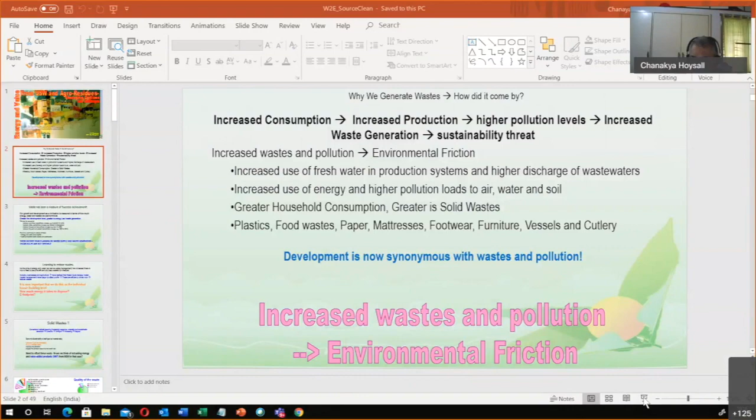Okay, I'll start sharing the screen as well. Yes. Oh, I should have known. How do I unshare the screen? In slideshow, okay. Sir, there is a tab called share. I have multiple screens, so that's my problem. Maybe you have to share only one particular PPT screen. Yeah. Now I'm sharing the right screen. You can see that? Yes, we can see your slides, sir. Second slide we can see. Okay, thank you very much.

And also urban solid waste for a long time has been a major problem. Bangalore has always been in the news because most people in Bangalore are aware and they would like to have a better city. So there is a lot of reaction and activism from the population, and that is driving the city of Bangalore to make better and better waste management systems, especially trying to recover energy and value-added products.

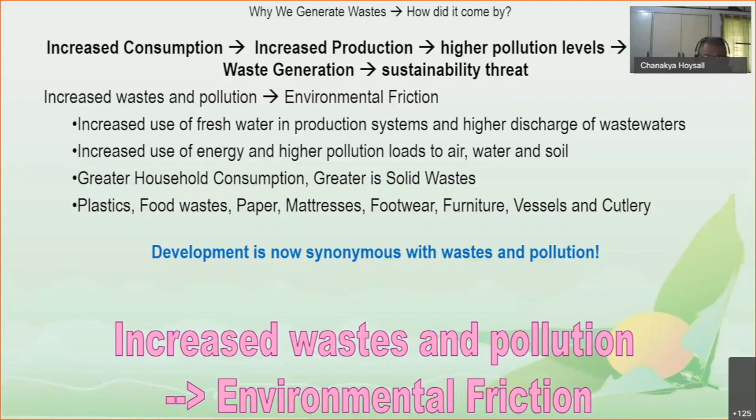Waste has been very problematic and comes in multiple levels. One is our lifestyle, the other is our aspiration as well. One of our major aspiration drivers which leads to increased waste is the fact that we measure our success and achievement by comparing it to some other developed country. One of the typical indications you will find is people saying Indian people's wastes are very small, which means they're not developed.

So you compare Bangalore with New York. People in Bangalore have a per capita waste production of 0.5 kilos, and in New York City it is 2 kgs per day, which means they are developed. Your aspiration now becomes to reach that point, and ironically, we end up generating more waste. I don't need to elaborate on this, because the more you start ordering on the internet, the more solid waste you're going to start generating.

So we make this kind of funny comparison, or in the back of our mind, for some reason, we are stuck on the idea that we have to waste something, and only then can we show that we have progressed. So if you are very frugal, very careful, and don't throw out any waste, your neighbors are going to laugh at you: see, they don't even waste anything. This is the surprising thing you'll find in the social construct, and this is also something that you need to break, along with creating new technologies for this.

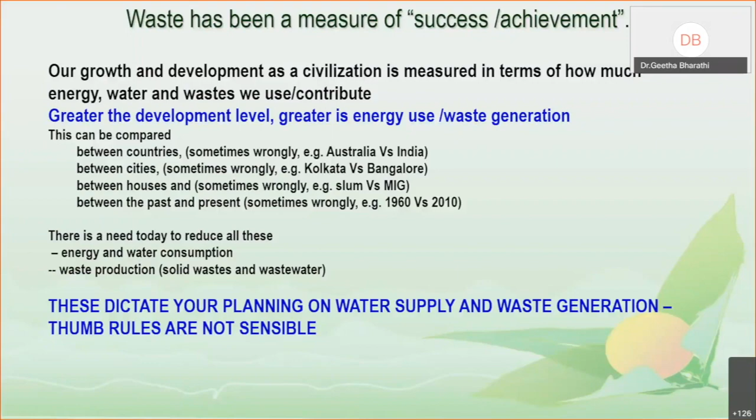So these are the things that dictate how we need to plan for the future, how we need to address or capture the increasing waste generation and the composition of waste generation in our future. Thumb rules that we used yesterday are not going to be sensible. So we need something different.

One of the first things, obviously, which everybody says, is you reduce waste. Because the price of energy, okay, today there is a glut in energy, but slowly, if we start documenting the costs of decommissioning various of our energy producing units, one simple example is the nuclear power systems. The cost of energy production through the nuclear system is much smaller than the cost of decommissioning. You have to look at it, you have to take care of it for hundreds of years.

So the cost, if you add today the future cost of decommissioning, then the cost of such kind of systems perhaps will start increasing and make it not very sensible, or they would like to minimize this and keep it to a low level. The same thing may apply to the various solar systems that we are getting. We don't know how to decommission them, how to dispose them.

And one of the things about learning to reduce waste, the peculiar thing that has occurred to most of us, is the fact that in an industry system or in a business, most people have realized that the inputs are the ones that are most expensive. So if you reduce your energy, you reduce the water, reduce the quantum of waste that you need to manage, then you're increasing your profits.

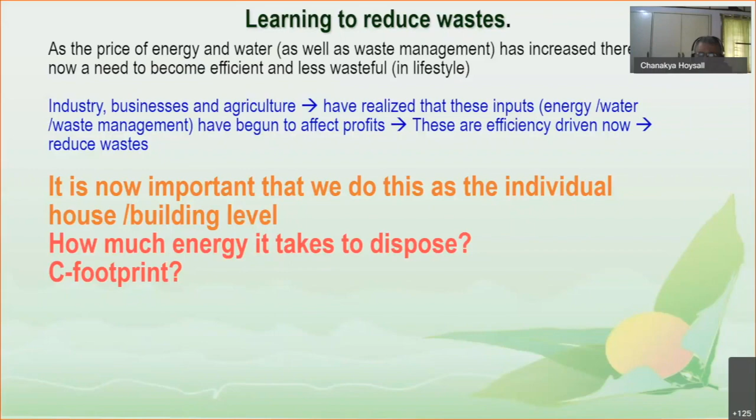So when we say solid waste, we end up in a very constrained frame of mind where the moment you say solid waste and you start planning towards it, we compartmentalize it into a generation stage, a collection stage, a transport stage, a processing stage, and the disposal stage. And you will find an expert for each of these segments, and they don't talk to each other. So this is the biggest problem that we have.

So the collection system does not match with the transport system. The collection system does not ask, can you process something locally? Why do I need to transport it far? And when we mix up waste, this is one place where my good friend Jagannath from Mysore says, unity does not lead to strength. That means if you mix up all the waste, then you're finished. You can't recycle it. So it's important to segregate at the generation stage.

And once you segregate, they can enter various streams and get recycled. So this will add value to the energy generation part, where the bulk of the waste will go. So you find, depending on the city and how it's progressed, collection cost is one of the largest. And of course, transport, disposal, and treatment, all these also add to the cost.

And our costs almost match the same as in, say, the Middle East or in the West. We are also spending very close to between 2,000 and 4,000 rupees per ton, which is similar to what is being spent elsewhere in the world. Why is it that we can't make something better? So we need to offset these costs, one with energy, whatever energy we can extract, and another through value-added products that we can generate, in our case either from municipal solid waste or from agro-residues as well.

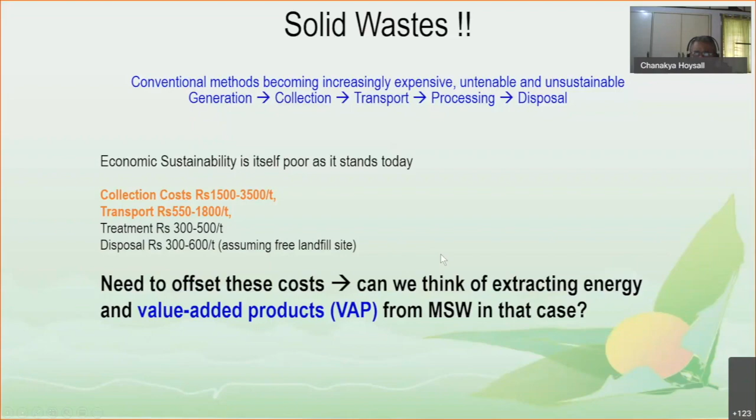So let's take a look at what is the kind of waste that we generate in a city and who generates what kind of waste. So we did this exercise a little while ago, and these things have not changed much. Perhaps the green part, that is the fermentable part, has kept on increasing in spite of various changes in lifestyle. So what we see today, the major part of the waste in the city of Bangalore

is about 3/4 coming from fermentable material, that is putrescible and garden waste, and some amount of paper, cardboard, which also can be degraded or recycled depending on how badly it is soiled. And if you look at different sources, market waste is obviously a very large decomposable component. And people who buy from the street vendors, where people are sitting, you see after the market is over, all the waste is there on the ground.

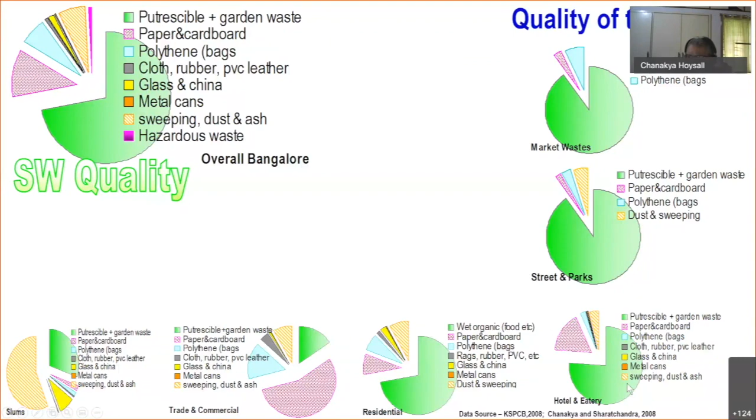Streets and parks, Bangalore has a large number of streets and parks, they also generate waste. But luckily today, this waste does not enter the major stream. They are now being treated in a decentralized manner. Very surprisingly, hotels and eateries also generate a large quantity of waste. If you end up seeing the waste being dumped there, you'll be surprised.

And as you will see in the next slide, about 20% of Bangalore's garbage is coming from hotels and eateries, which means these people prepare this kind of food and keep it ready for any customer to come. So when its life is over, entire large cans, I have seen 200-liter drums of tatte idli, 200-liter drums of paneer butter masala being sent back to waste treatment. I'm surprised that we have so much food to waste.

And of course, in the residential segment, you will also see in your daily life, morning you're in a hurry, you have to rush, but your child is refusing to eat. You have two choices. You say, okay, I'll pack it and give it to you as lunch, which is a very difficult proposition to say. Or you say, don't worry, throw it, we'll go to school because I'm late. So most of this food obviously goes to the solid waste.

And as you see in the next slide, these four components form more than 90% of our waste. And then the slums and the trade come. Trade is a very important thing because in trade we generate a lot of solid waste, but most of it gets recycled. All packaging material, somebody buys it, takes it away. Polythene, any form of plastics are recycled.

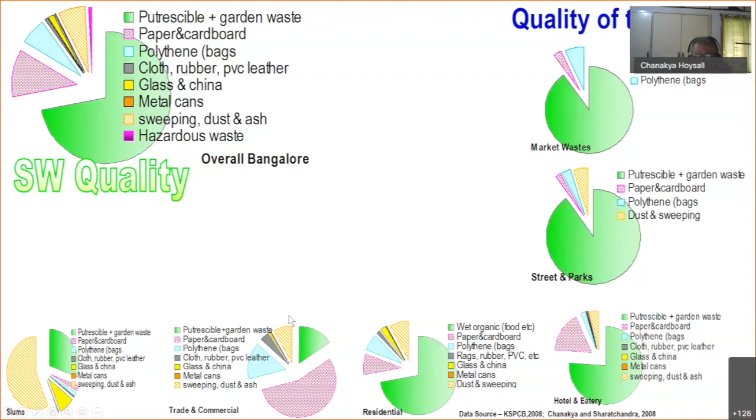Bangalore is one of the largest plastic recycling centers in India. I think they have a capacity close to 3,000, 4,000 tons per day. So much of it gets recycled, although some amount of plastic still goes. And the slum gives a much smaller footprint on the waste that we can see here.

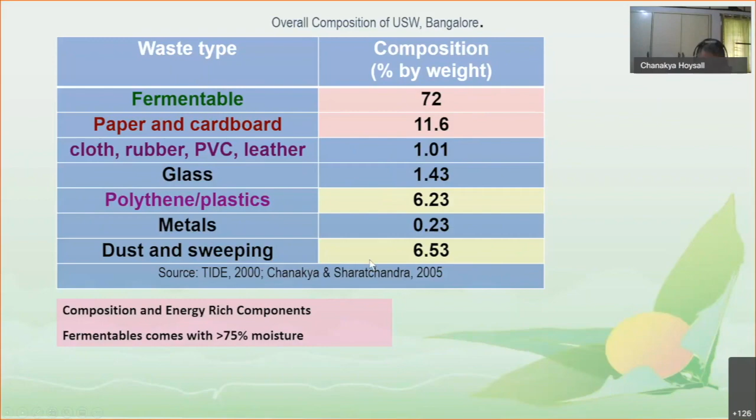If you look at the average composition, 72% at the household level, at the dustbin level at your house, you find a large part of it is food waste, which is fermentable, and a large part of it is paper, cardboard, and various forms of recyclable materials. This has only very marginally changed over a long period of time. So when you remove the paper and cardboard and the recyclables, the fermentable component rises to beyond 85%. And in rainy season, it's more wet, and you find it also starts smelling.

This was measured in 2005, trying to find out who contributes the largest to the waste system. The former chairman of the Pollution Control Board, Professor Sharatchandra, and I managed to dig out various forms of data and mine the data to find out this number. About 55% comes from the domestic, 15% from the markets, 20% from the hotels and eateries. And this very clearly is 90%. So very clearly you see that if you address this at source or nearer the source, you are hardly going to send anything out to the dump sites.

And it's not that people have kept quiet. There have been major attempts to have a separate channel of waste collection for hotels and eateries, because this is largely food waste. Either food that's coming from the plate, food that is left uneaten, and cooked food that cannot be served. All these put together. And these are very easily fermentable, and Bangalore has attempted various biomethanation plants because the moisture

contents are very high. And similarly, cities like Pune, Hyderabad, Chennai and various parts of Tamil Nadu have also put in biomethanation plants for this kind of waste. Many of them are successful, many of them are having a lot of operational issues, but not technology issues.

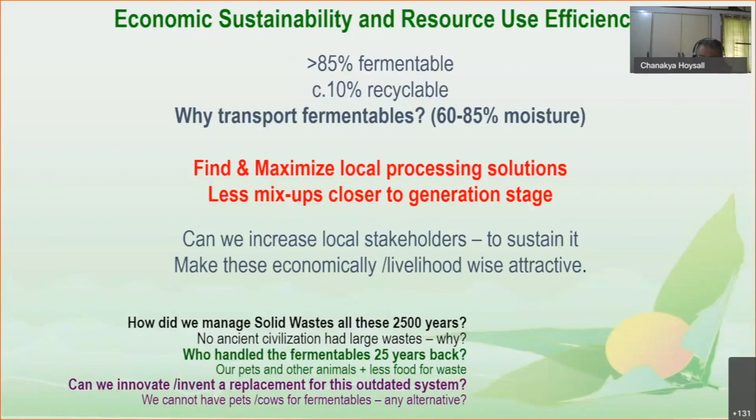Then energy comes in very clearly, because the moment you start looking at the breakdown of the costs, the energy cost of transportation is one of the largest. Energy cost of collection, because we are using smaller vehicles, is also going to be high. So household level segregation and recycling becomes the first choice.

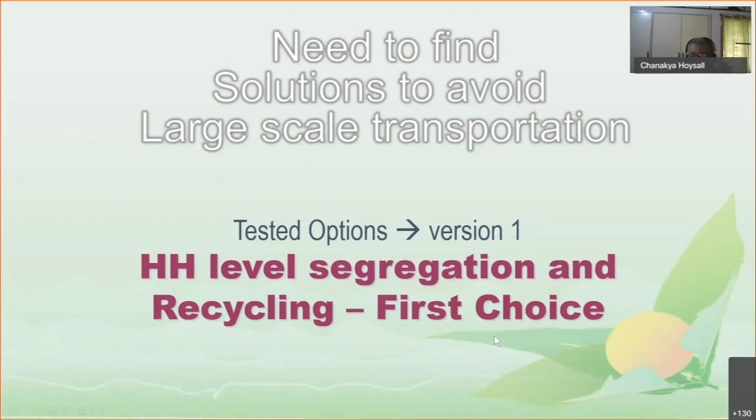It's not that we are giving very philosophical things. These have been done for the last 20, 25 years in the city of Bangalore. Different parts, different levels of success. This is one in Rajmahal Vilas somewhere around 2008.

Vehicles would come with different compartments and they would collect them separately. Organic waste would be brought in separately and they would collect about 32 different recyclable materials. And what was not being recycled was sent for composting. Unfortunately, had they had access to a biomethanation plant, then none of the ugliness of the solid waste would have been there. What you see here surprisingly is that what we throw out as fruit peels also has a large value.

Sometimes I used to make a joke that when you think you're looking a little older than your age, you go and have a facial. And guess what is the largest bag they put in is orange peel. And if you were to collect it and somehow send it back to making that, I'm sure you would have made a fortune only from various these kind of things. Of course, here we can use the orange peel into giving fragrances to all our daily oil products. And ash, coal, eggshells, everything had a market.

With my friend Srinivas who was doing this, they tried a new method. The point I'm making is, even at this scale, you can dump in a lot of this loose waste, stand on it, bundle it, bale it, and then send it to various recycling units. So you could bale plastics, you could bale waste paper, you could bale newspaper. All of them go for some kind of value-added options.

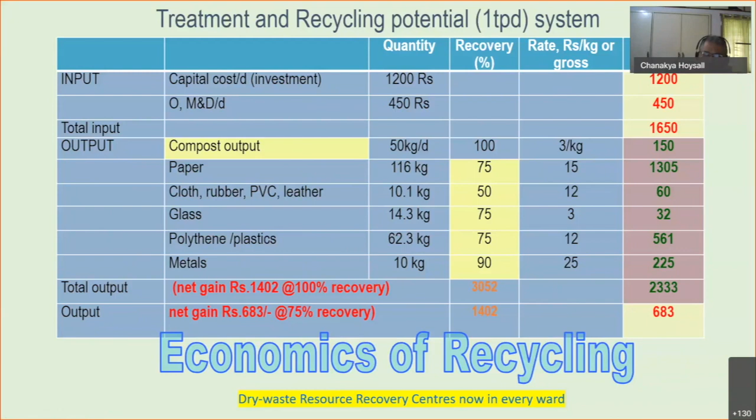There's a small startup in Bangalore itself which is making sheets from which school furniture is being made, especially from plastic, mixed plastic that too. And a couple of days back, you find an organization in Bangalore is making houses from waste plastic. It uses 4 tons of waste to make a house at the cost of 4 lakhs. Now, these are the kind of innovation that becomes important. So that value addition to this component of waste becomes high, and which augments the income that you can get from energy.

So when you look at energy, I'll now move from value addition, emphasizing on value addition, to technologies that we have in this country for our type of waste. And I specifically speak about waste on the southern Karnataka and coastal Karnataka region because the food waste and the food garden and fermentable waste are a higher component. When you talk about energy recovery, when you talk about waste management system, please remember the food habits, the lifestyles, and the size of the city really matter.

In a city like Bangalore, we have a lot of food waste. But when I go up north into cities like Raichur or Gulbarga, the food content comes down, the vegetable matter comes down. You have much drier waste. So you can't use a thumb rule for all the towns. And technology for energy recovery, as all of you would know, any technology is scale sensitive. We have very rare technologies which are scale insensitive. And you have dry waste where you can straight away go for thermal routes and wet waste which require biological routes.

Many a times in the state of Karnataka, many proposals have come for burning garbage. And most of you can go back with your high school knowledge of calculation and say that if you have 60% or more of moisture, then the energy cost of drying will be more than the energy that you recover in the form of heat when you burn it. So for wet waste, typically it would be ideal for you to go in for biological routes.

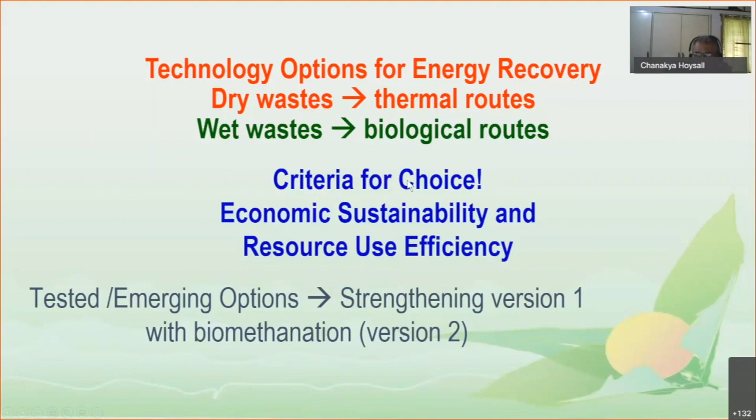Dry waste, yes, becomes easily amenable to thermal routes. But please remember, you might have a better recycling option compared to energy. So the first choice would be which is the best recycling option, then which is the best energy option that you have. So we have dry waste somewhere between 5 to 15%. So thermo-chemical routes like combustion, pyrolysis, gasification, synthesis, all these are in different stages of maturity. So you need to make a choice on what might be economic.

I also spent some time with the BBMP trying to figure out what might be the best waste management technology. Whenever BBMP has called for bids, the economic threshold for waste to energy, especially the dendrothermal, that is the combustion route, most of the times the bidders come back and say that if the daily waste is in the range of 600 tons per day, which means we are going to make about 10 to 15 megawatts of power, then it is economically viable. Otherwise, scale-wise it becomes very uneconomical.

So today, Bangalore is also trying to convert municipal solid waste into RDF and create a 14 megawatt dendrothermal plant. The anticipated power cost is somewhere between 7 and 8 rupees per kilowatt hour. So this is at this scale. Now, if you make the scale smaller, then your capital investment and your operation costs will go higher, and the 7 will become much higher.

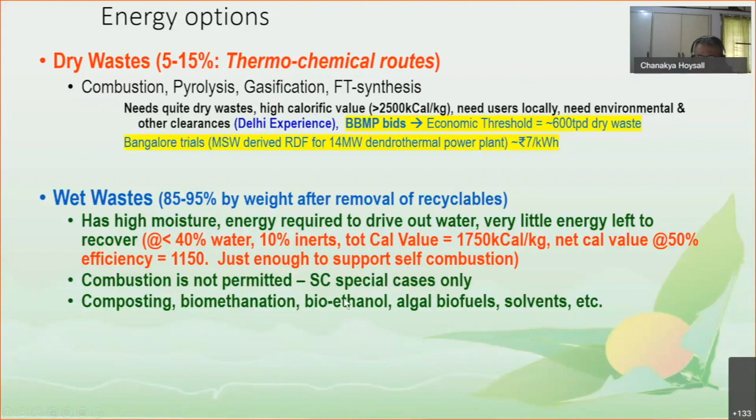So composting, biomethanation, bioethanol, algal biofuels, making solvents, bioplastics, these are the directions in which the world R&D is going. But biomethanation is more or less well established today. And soon we may go into products like polylactic acid and bioethanol in the near future.

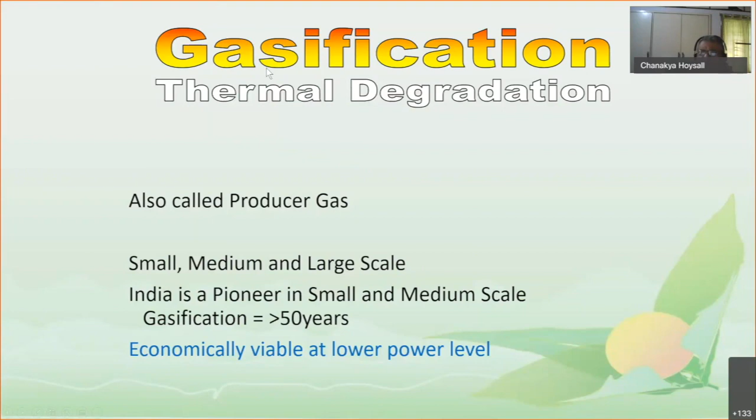So typically when you have dry waste, you look for a thermal route. At the small scale that we are dealing with, gasification seems to be the most economically viable, of course, gasification both for biomass and dry urban solid waste. So, this is a typical gasifier. Many of you are very familiar. But you need to densify it to a certain minimum density of 0.5 grams, and you need to have pellets of about 3 to 5 centimeters in size.

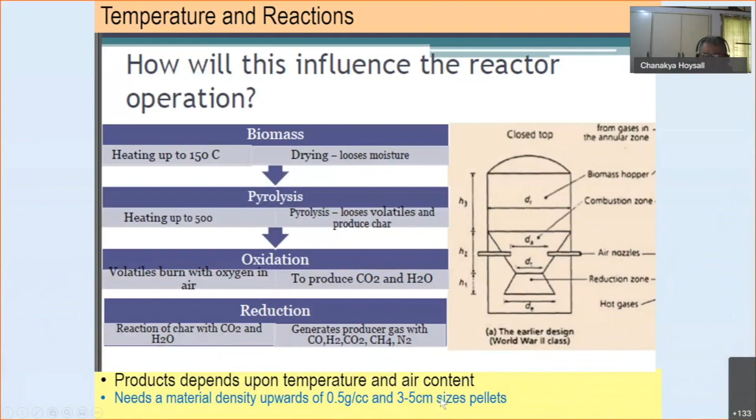What is critical is when you look at the scale on one side and the energy cost, you will find that at the small scale that we're dealing with, in the sub-megawatt range, gasification has the highest energy efficiency, and consequently, you will get much better economics. Of course, converting this into hydrogen, into syngas, and other things for synthesis can also give you a much better option.

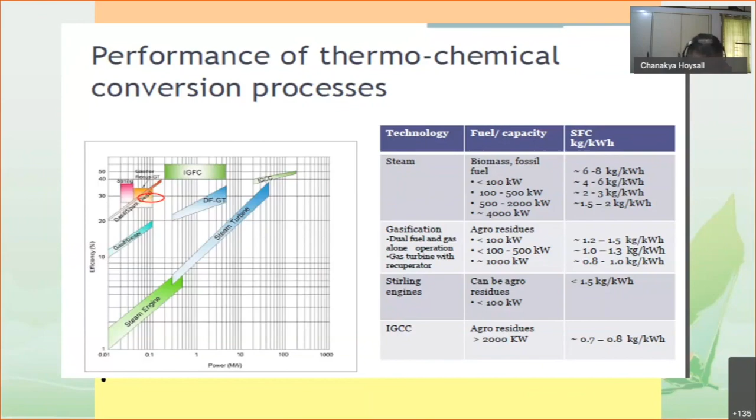Now, in gasification, formerly most people would take the syngas, clean it up because it's slightly dirty, and run a dual fuel engine. But now modern gas engines are available in India which can run on syngas as the sole fuel. That's an important change.

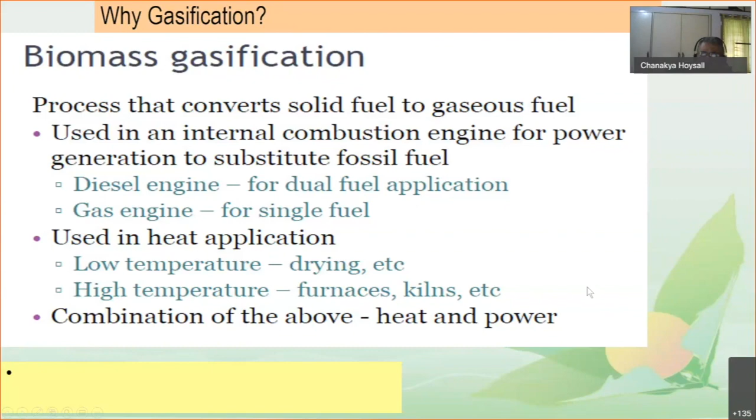A typical gasification train will have a gasifier and multiple levels of coolers, screening. You can extract some energy here, and of course run the engine, or you can run it for other synthesis and for biosynthesis, including hydrogen.

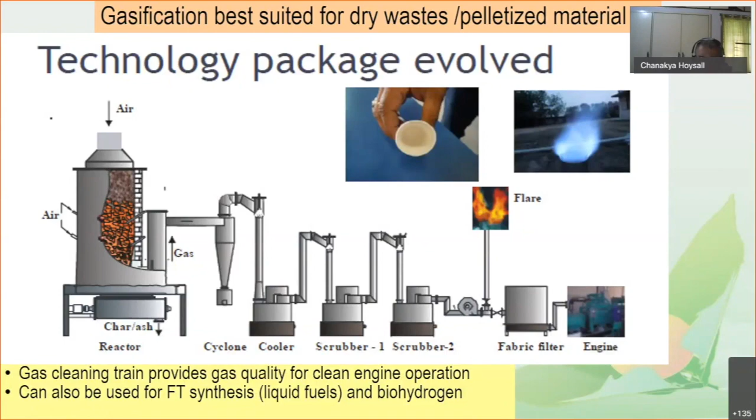Now the larger problem that we have is the wet waste, for which we need to look at biomethanation as an option. It's called by various names: biomethanation, biogas, biomethane, today compressed biogas, synthetic natural gas. India has been a pioneer, which has made a large number of small and medium scale biogas plants, and the technology is there for over 100 years. When you say biogas, you typically look at an old KVIC cow dung based plant, which was developed somewhere in 1935 and popularized from the 1960s.

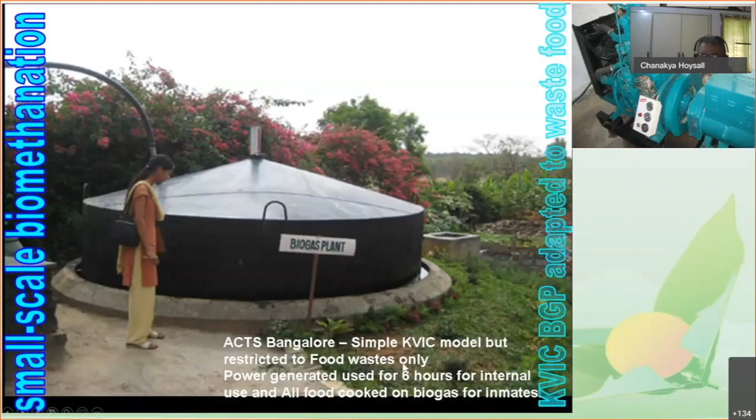So you can use this kind of plant for food waste, but you can't use it for leafy material because the material starts floating. And of course, you can also have a 100% gas engine, CNG engine, or a biogas engine which is a slightly derated CNG engine. So you can have small scale power generation, becoming self-sufficient, in apartments, so that instead of solid waste which stinks, you have a completely clean energy system, and the liquid that comes out can go back to the garden as a fertilizer. This is old knowledge, nothing great about it.

But when you have leafy material like banana leaves, banana fronds, then you need a different technology. Such technologies are now already emerging. The plug flow reactor: you just dump whatever you have without any processing, without pulverizing, and it floats, but it moves horizontally, and you collect the gas in a bag. You can't have the gas storage and the gas digester in the same unit. So there are now modules which are available up to 5 tons per day, and you can have multiple modules for urban waste.

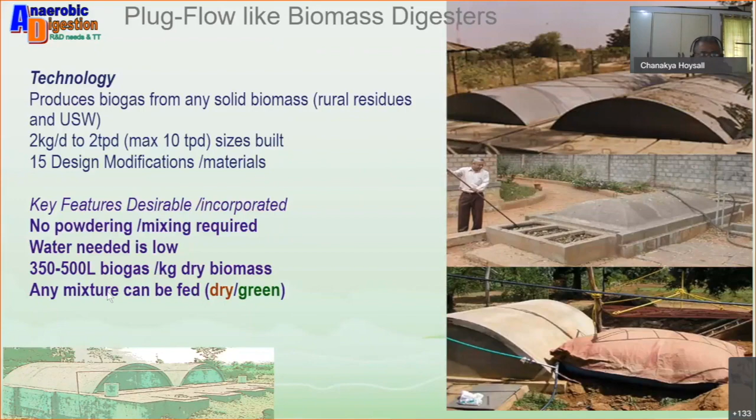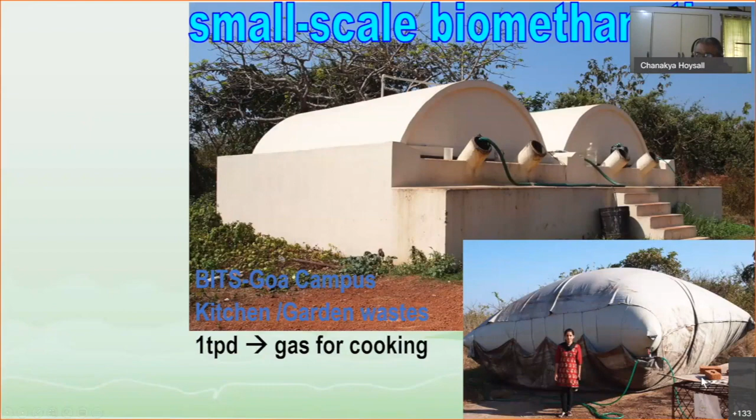One such system is there. This is a one ton system in BITS Goa campus, which uses all their garden waste, mixed waste, garden and kitchen waste, and they collect gas which is used for cooking, and thereby their campus is clean. This is built in Infosys, using the waste from Infosys Mysore food courts, and this is for coffee pulping. Similar technology, similar device structurally, but here agro waste water is passing through a biofilm based treatment plant where leaf material and fiber becomes the biofilm material for the treatment.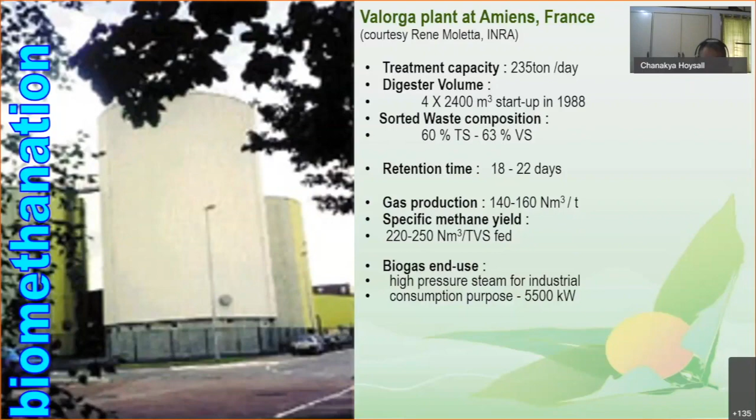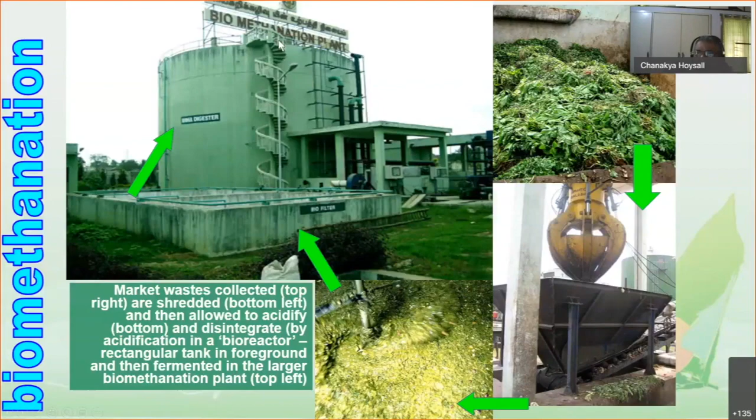We have a similar plant in Koyambedu in Chennai, which is a modification of the plant by the BIMA process, biogas induced mixing arrangement process. Waste from the market is picked up, and it is made into a small chutney and kept for a while so that it disintegrates. Once it disintegrates and becomes a nice solution, it is pumped up here, and you get biogas from such a plant. They have a large engine, 1 megawatt engine, and a gas storage.

Inside is a balloon, which goes up and down depending on how much it is filled. It is suspended from the top because when you have a balloon, you have a lot of animals which try to eat it up, squirrels, rats, so it doesn't touch the ground anywhere. And none of these animals can go up. So that's why it's covered here. And these are typical natural gas engines modified. Now you get much better engines, much higher value. This was run for about 10 years.

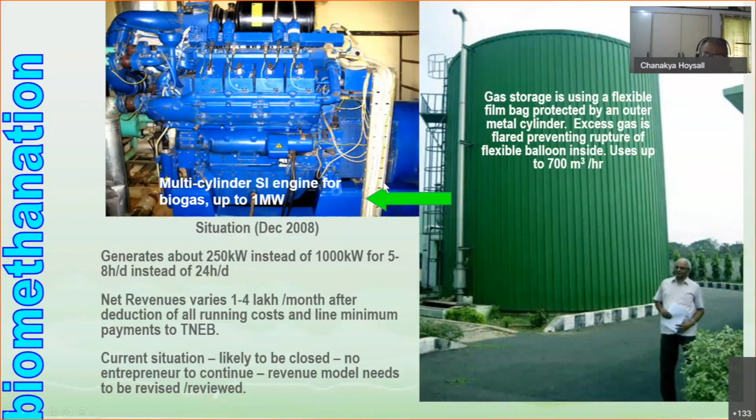But the major revenue model here was that they would be selling it back to the electricity board. But strangely, due to their contract terms, they end up paying almost an equal amount as fixed costs compared to what they recover from energy. And now you need a more imaginative revenue model.

Now, such biogas plants, with all these pictures I showed, will convert the major 85 to 90% of your urban waste and a large part of your rural residue like paddy straw as well into biomethane, and you can generate energy. Now, this is more or less established. So the question that one is asking is, can I make this resource use efficiency a little better? Can we squeeze more so that our revenue streams increase, more people get employed, and we are sustainable?

So typically, if you have a biomethanation plant where you have water and biomass or municipal solid waste or food waste, you mix these two and put it into plants, then you get biogas as output, and digester liquid, which is the largest volume that you have. In modern day plants, this digester liquid is recycled back in place of water, so that your water footprint comes down and the process becomes a little faster. And you have digested residue as well. Now, for these three, can we find additional options to get more income?

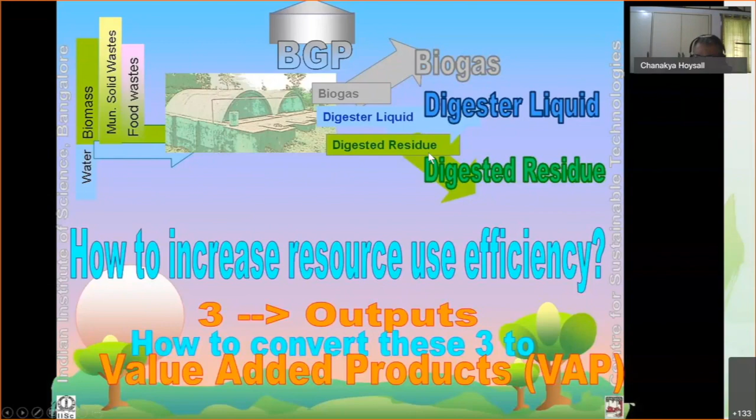So what I'm showing is a small town which ran its biogas plant for quite some time, Siraguppa in Bellary. It removed all its plastic content and recycled it. It collected mixed waste, started selling whatever could be sold. So that way their inventory and storage volume was very, very less. They tried to sell the biogas, but it was too early in the day. But the digested residue was made into vermicompost and sold.

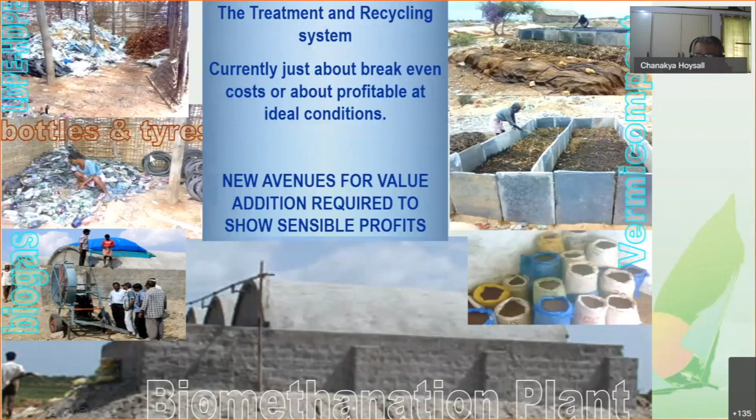Their cost was about 16 lakhs per annum for the whole system. 4 lakhs equivalent was recovered only from this. Of course, there was no sale, but the value addition. Had they made some sale of biogas, as is possible today thanks to various policy issues, then this would have been a sustainable revenue model. So no doubt they won the national award for a very innovative small town in urban solid waste management twice, in the years 2009 and 2011.

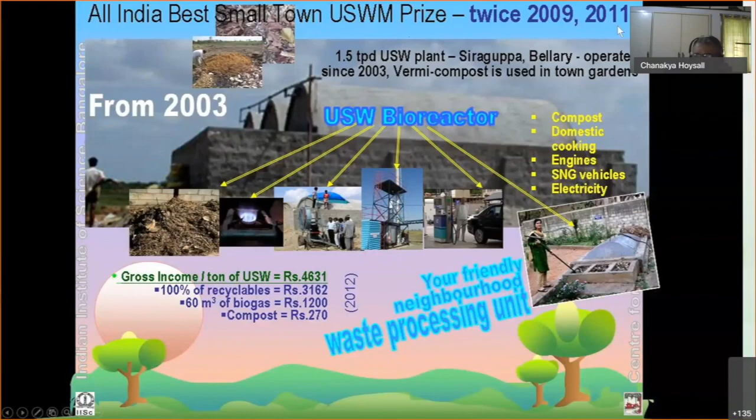Now, let us see what happens if I change the composting to biogas. Today we can get a value of about 50 rupees per kg for the compressed methane, which means from barely about 500 rupees, I get 2,500 rupees. So these kind of calculations you can always make. This would be location specific and cost specific. This is slightly dated. But if you add recycling and biomethanation, compressed biogas, then you have a revenue model functioning very close, even as low as 1 ton per day.

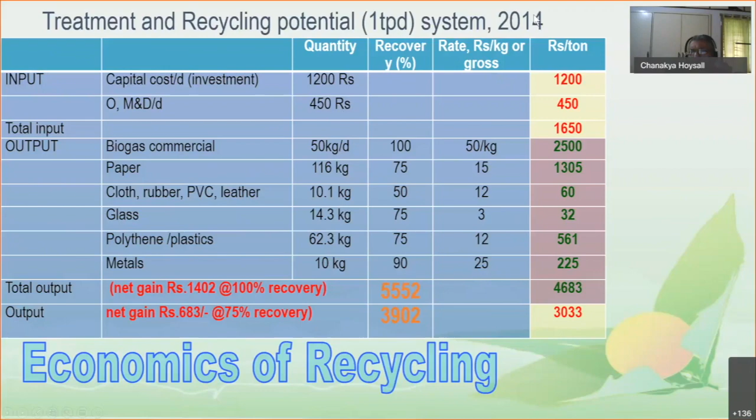So you have biogas plants now at various scales, and what is happening in Kerala today is that the state is not collecting the wet waste. The producers of wet waste were asked to process it in their own house. So they either compost or they generate biogas. And so biogas has become very popular in Kerala, not because they want the biogas, but that was the only way they can process their waste streams in their houses without any ugly situation. So this goes back into the kitchen, and they make at least an equivalent of one meal a day with this gas.

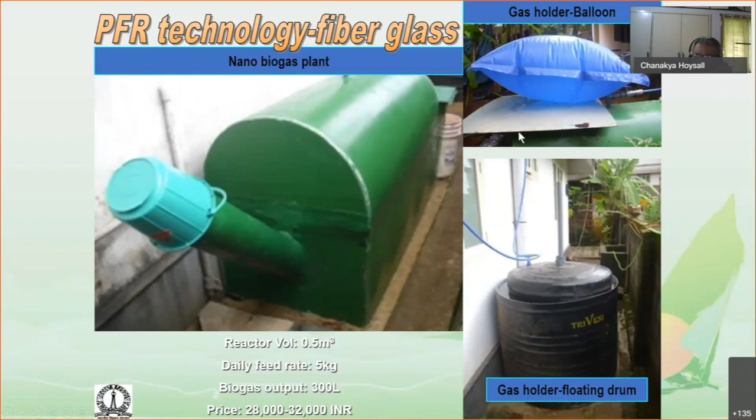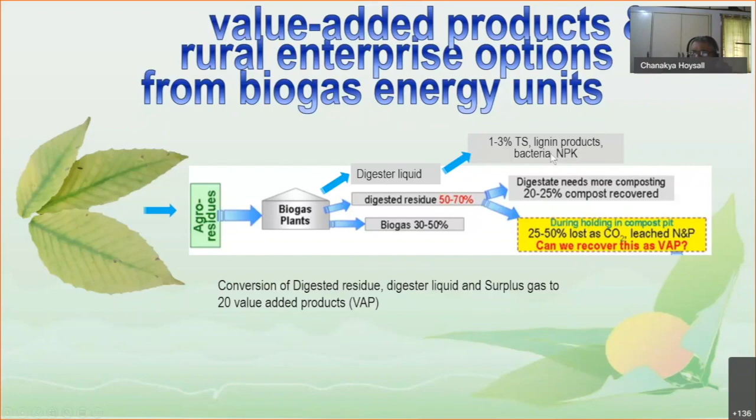So coming back to this, in mass terms in the digester, if I use agro residues as the input, then 1 to 3% of the solid mass ends up as lignin breakdown products, some bacteria, and some N, P and K in the digester liquid. Somewhere between 30 to 50% of the mass is converted to gas, and the remaining goes as solid, digested waste. So we need to look at what technologies are possible and how we find ways to add value, because this gas is going to give us energy either as compressed gas or electricity. For this I need to find a way, and this also. What we have done at our center is try to see what all we can do.

One of the interesting things is this digested mass, especially if you're dealing with residues from trees and agro residues. Then the digested residue can be dried in the sun and gets sun sterilized.

Then if I add a little bit of compost, sorry, if I add some mushroom inoculum, then I have a lot of mushrooms growing on this. Remember, what could be digested and removed in the digester, what is left is lignin material and only mushroom fungi can. So here is a beautiful way in which you can generate mushrooms. And when you're growing mushrooms, if you sprinkle some water, I can also collect some enzymes from them and use this enzyme. So if I can have a market for these two, as I'll show you a little later, we can have a technology system in which the payback period is less than 1 year.

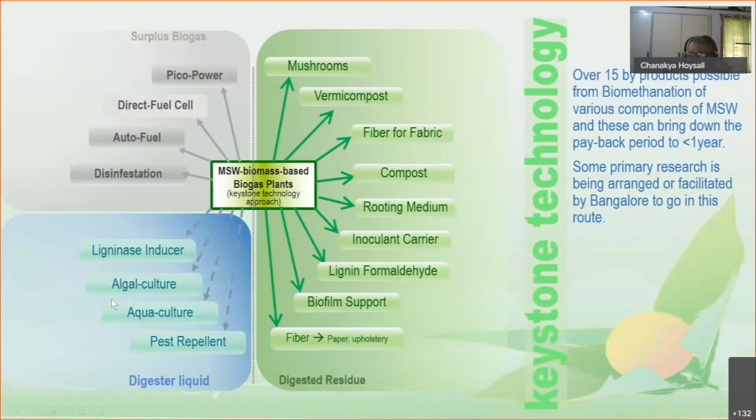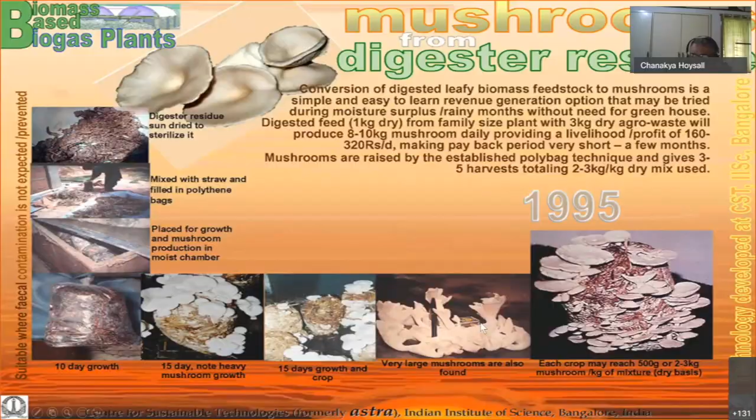So there are about 15 such options. I'll show you a few of them. So this is the digested residue that you see typically from a biomethanation plant that uses agro residues or herbaceous material as feedstock. Dry in the sun, add some inoculum, within 15 days you get mushrooms. The same picture is here. So mushroom yields are 3 times more.

So what happens? If you look at this kind of a value-added system, even at a very small scale biomethanation plant where you're talking about 30 to 40,000 rupees for the plant, your payback period is about 90 days, because this will give you a lot more income from mushroom than from the gas itself. Gas is going to replace your LPG.

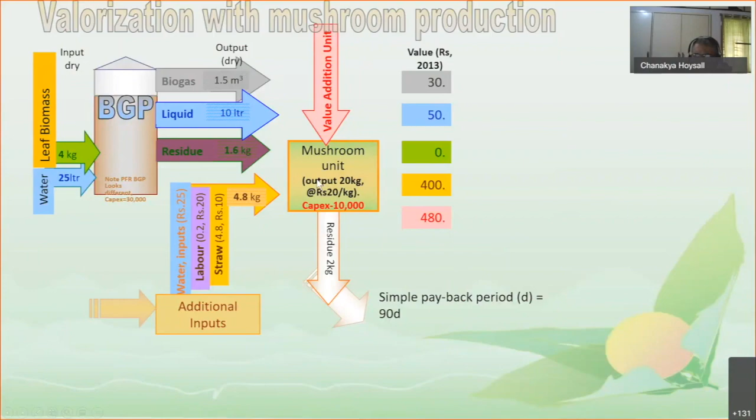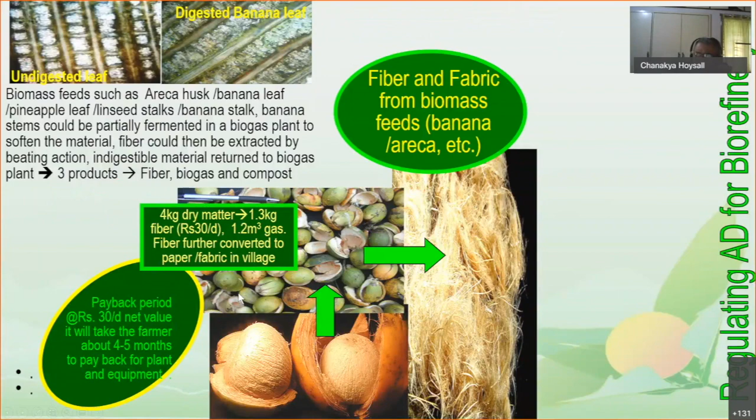Now, if I'm using banana leaves, or we have a lot of areca leaf, areca fiber, the same plant can be operated to produce fiber, 3 types of products: fiber, compost as well as gas. So then if I look at a mass balance as I see here, my payback period is less than a year. This is the kind of fiber I get from banana.

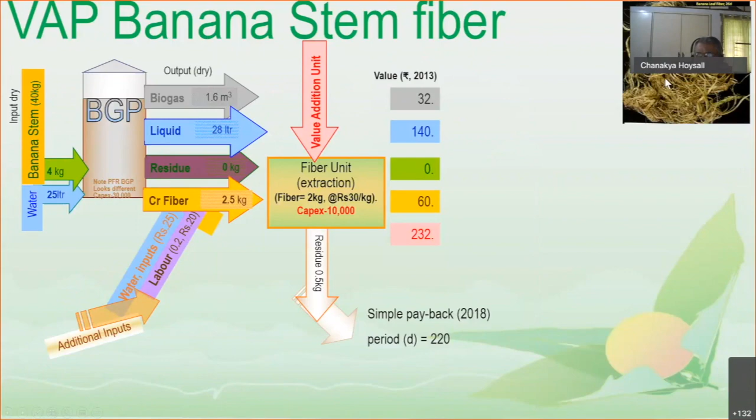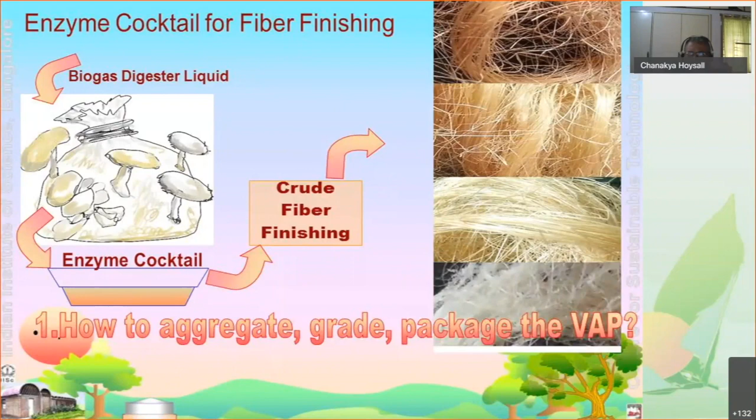Today banana fiber is becoming popular, but most of the banana fiber is extracted mechanically, but you can also do it by retting, and you get a much finer quality fiber as you see here. And I can also extract enzyme from this to polish that. So that enzyme plus that banana fiber can become a very fine looking fiber which I can start selling at 200, 300 rupees a kilo. So I'm talking about making multiple value-added products from the same technology in addition to the energy flow.

So what I would like to conclude today is that if you look at both the waste from the agro system as well as from the urban solid waste, we need to look at how do we go closer and closer to the producer itself, so that we can recycle, we can push the fermentables to one route, biomethanation, and gasify the other, which can't be recycled. So at the end of the day, we have very little to send to the landfills. And as you might have seen in the news in the last 2-3 days, more and more recycled products are coming back in the market.

I was telling about boards from plastics, mixed plastics and films. Then even houses, house structures from waste plastics. You can also have all the road dividers, the park benches, everything made from recycled plastic. So you find that this system will use this recyclable 3 to 4 times, after which, when you can't recycle, you can send it for gasification and thermal applications.

What is important is that the Indian urban solid waste is unique and it changes with every city. You need to know what is the composition in your city and how it changes in the season before you think of making solutions. Yes, energy is an important route, but these two options depend on what is your composition and how well it is segregated upstream.